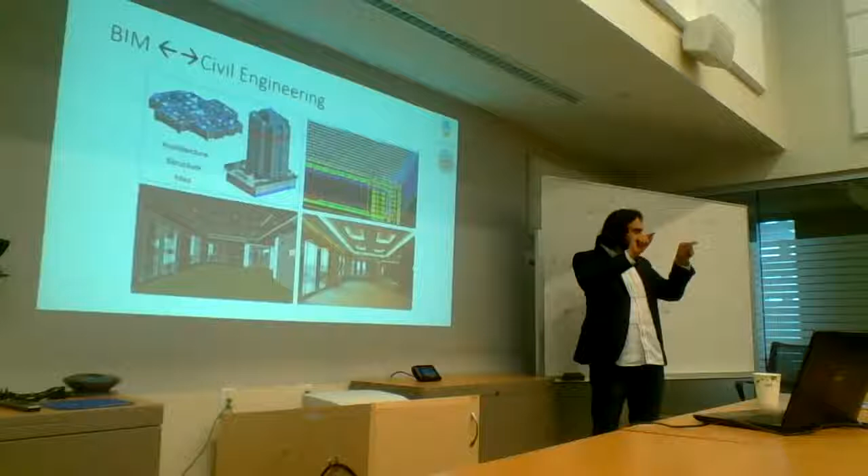There are so many definitions of BIM. Mainly it is the use of computers and IT equipment to simulate the construction before it happens, taking care of all the stakeholders at the same time. This is roughly what BIM is, but you can see many definitions online. I'm not going into detail on that. Now we have got some gist of how civil engineers can be connected in different parts of this project, on the environmental side and so on, but let's see some real applications too.

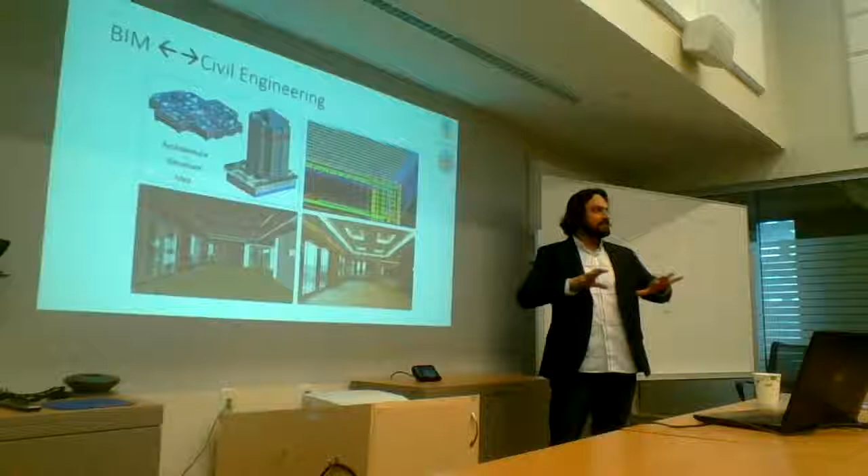So this is a real BIM model of a building where architectural drawings, structural drawings, and mechanical, electrical, and plumbing are all overlapped in 3 dimensions. So if there is any conflict, that can be seen as well. From that, the data is transported to software like SAP 2000, ETABS, and other analysis software, and seismic or gravity analysis has been done, whatever was required.

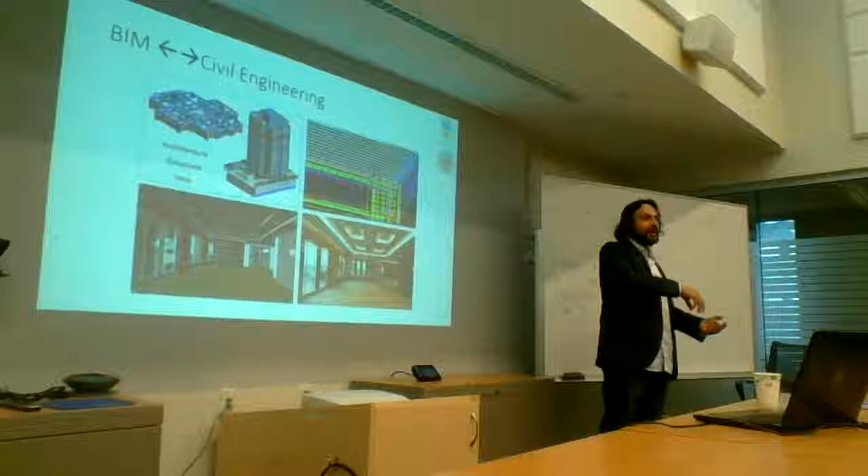And we now know that this RCC column should have this much reinforcement. Automatically, the software, SAP 2000, has transported the reinforcement detail back to this model. And now, without drawing a single line, the software has done all this drawing and detailing for us. This is very expensive, hard, laborious work for a detailer, which doesn't need a detailer anymore. It has now been done 100% automatically.

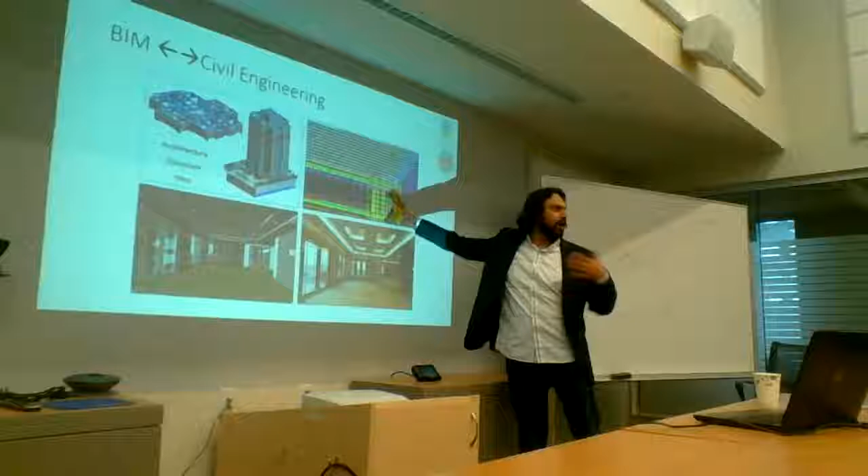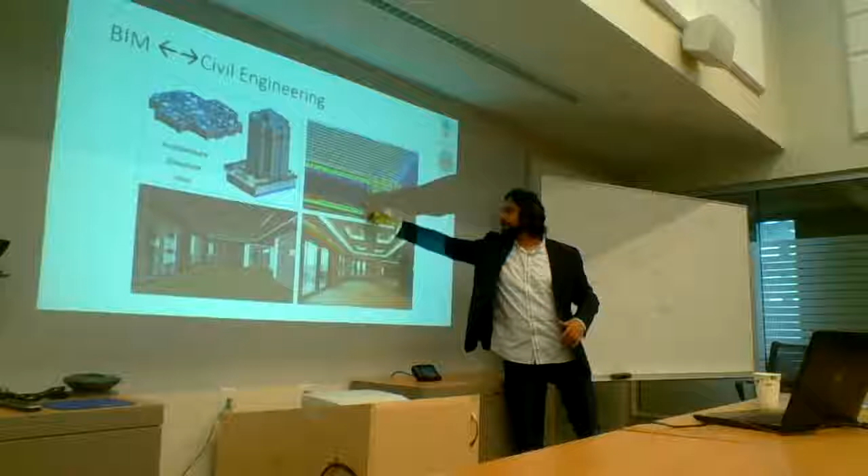So all the effort required to draw this curve and this vertical is now shifted towards the BIM experts who manage the connectivity between the experts of mechanical, electrical, plumbing, architecture, and structure, which eventually results in this. We have the white steel mesh in the slab, the positive and negative reinforcement in green and magenta in the beam, and blue stirrups. All of this was done not directly by a structural engineer, but automatically by BIM software.

This is a simulation of a building before construction, showing the least and most reflective surfaces, so that we can replace a material. It shows the material you're using and how it affects the lighting of the environment. This is the least reflective surface, and this is relatively the most reflective surface, as we see darker in color. Then this is the material model, so we can see what material we should use. A carpet. This is literally using a carpet on the floor; they're just simulating it there.

And once that is done, this is the natural and artificial lighting analysis of a building before construction. This is a computer model. It's showing how natural lighting is being affected. You can see the least reflective surface as well.

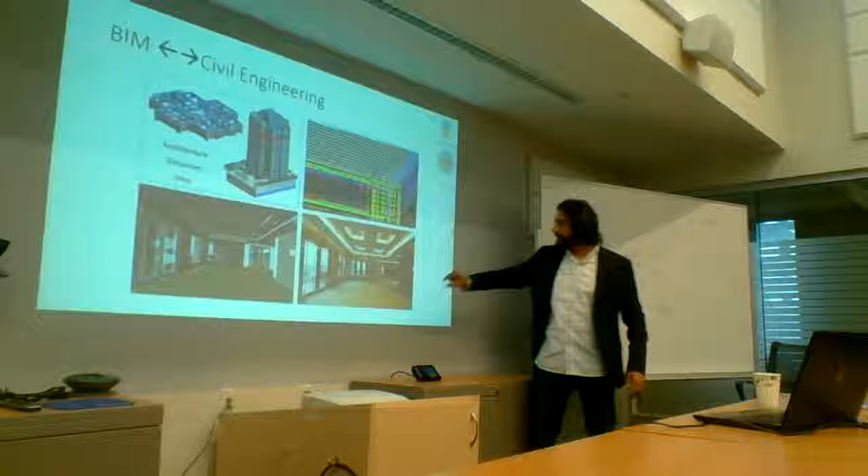Not only this, acoustic analysis can be done automatically as well. What software like Revit can do is, there's an icon for installing a tape or stereo player. You can put it in that room and play it there. And while you are moving out of the room in this simulation, you will hear the sound diminishing because you're farther from it.

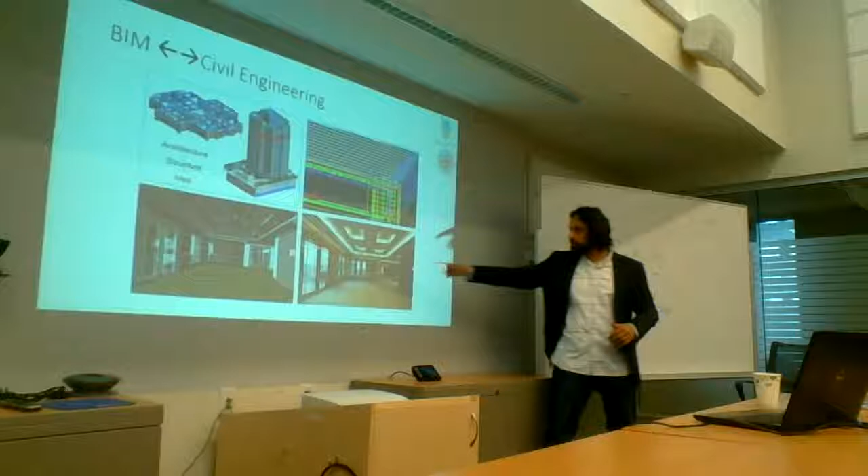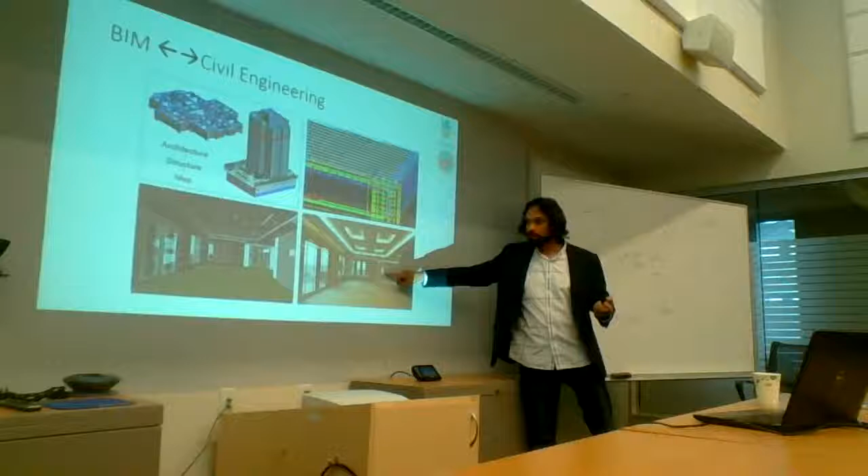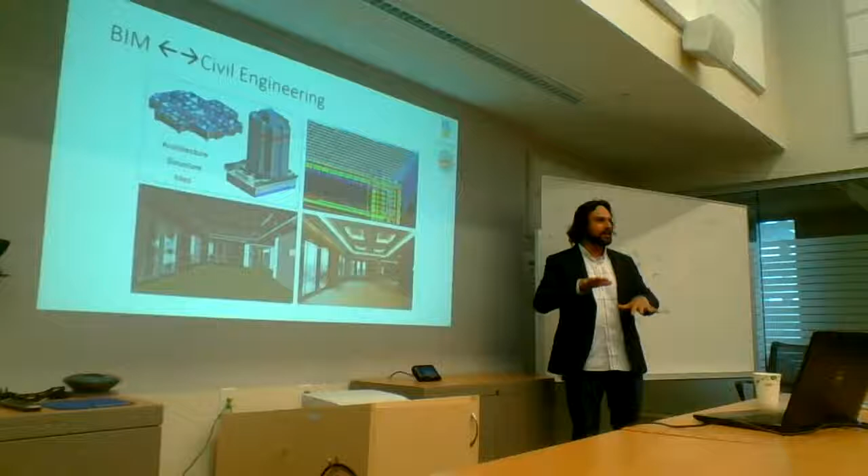And if you do this acoustic insulation structurally, with real acoustic design, as we use mathematics in that, if you do it properly, which the software can do, you will see a real control of acoustics there too. And so many other kinds of simulation before even constructing. We can do all of that. We can correct everything.

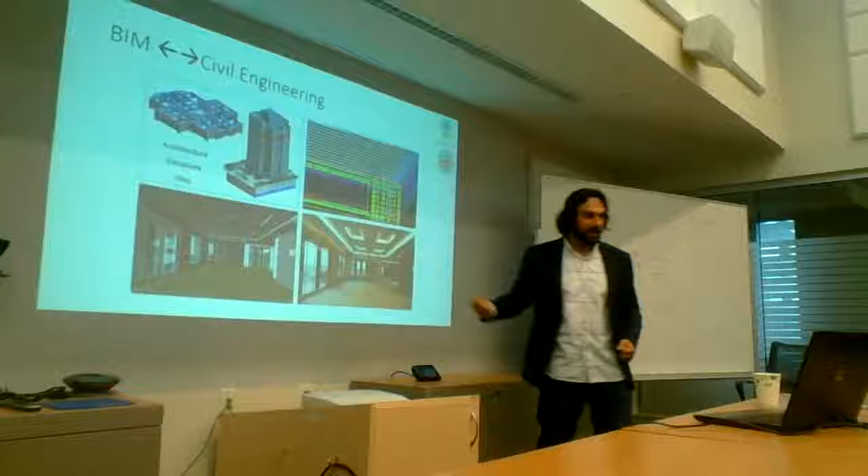We can give a real sustainable solution by using natural lighting, taking the most advantage of natural lighting from here, perhaps. Now, as I said, the construction drawings are drawn automatically. This is a view of Revit software. You will see this is the pile cap and piles, reinforcement there as well.

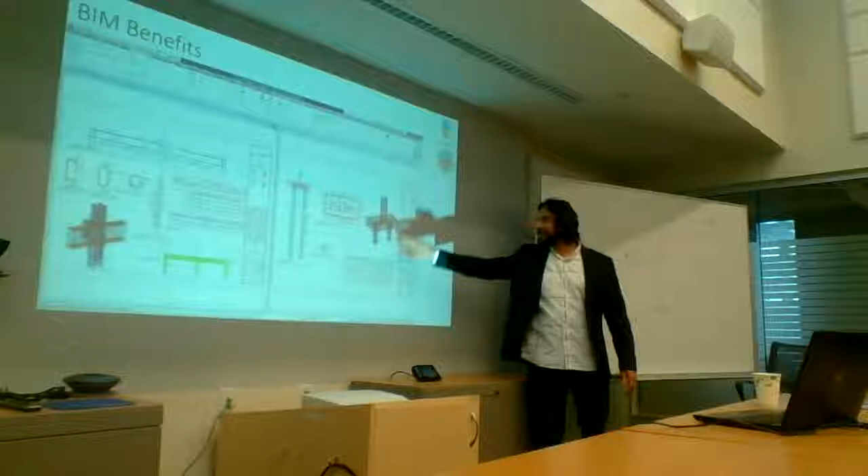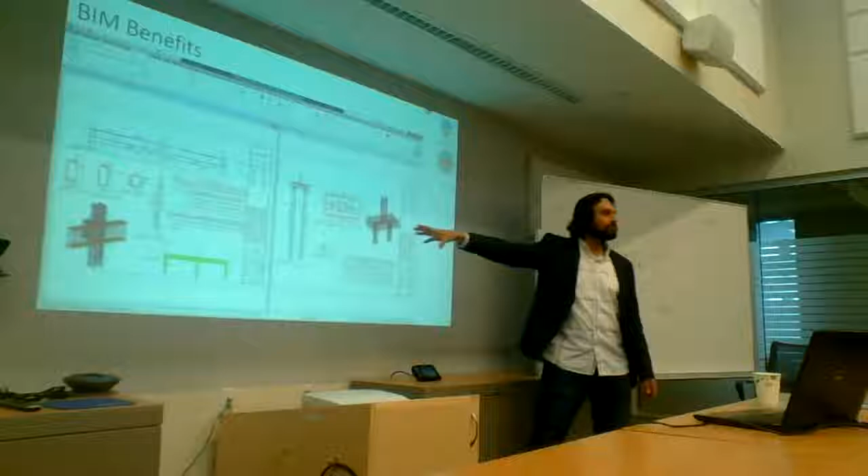There's a beam-column joint as well, very heavily reinforced. There's the bar bending schedule here as well. None of these lines and details mentioned on them are written or drawn by any person. Everything here has been done completely automatically. A structural engineer had to do some initial plan work there and someone else did the analysis there.

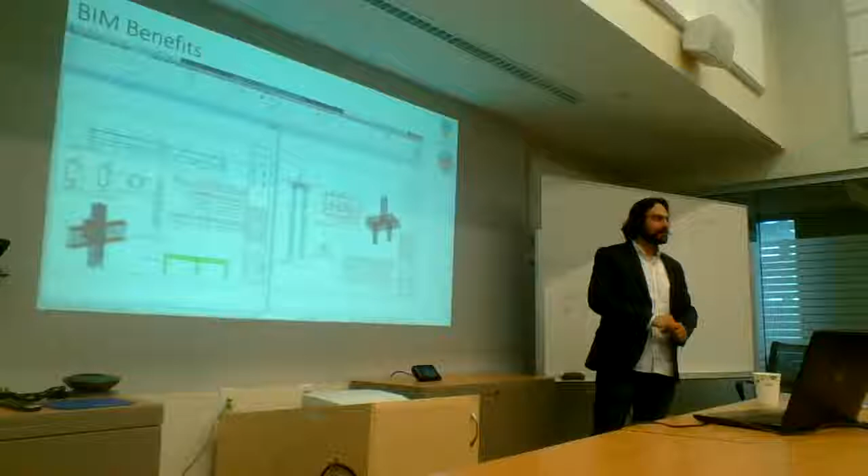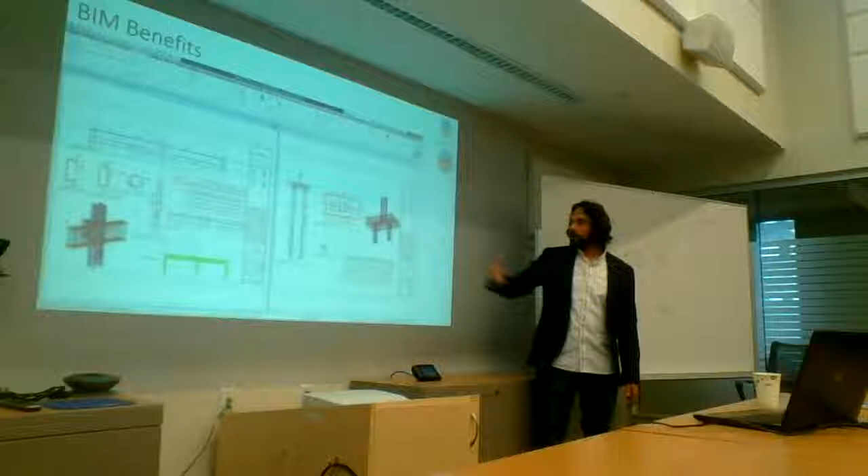And once it was time for construction, you just give some commands to this Revit software, and it will produce all these drawings automatically for us. So all this laborious hard work is not required anymore, but has been shifted towards those BIM experts. They are aware of the real things that need to be controlled, and should not be wasting time on drawing these lines and all this stuff anymore.

Now once we have talked about BIM, we have seen something that BIM is doing for us. It is important to know a term which is called the maturity of BIM or levels of BIM. In standards, they are numbered 0, 1, 2, and 3. The United Kingdom targeted 2016 to achieve level 2 of BIM, and they did it well before 2016. But the rest of the world is still struggling to achieve level 2; they are fixed at level 1 nowadays. In old times we had level 0, and even now we have level 0.

So if you're writing a contract document and signing it on paper, that is called level 0. But if that has been done automatically through an IT device, and a standard contract is automatically being developed, which open BIM software or buildingSMART software provide as open source, then there is no need of paper in doing these contracts anymore. So we are shifting towards level 2 perhaps.

Level 1 is actually the 3D and 2D models, as we use computer-aided drafting for these purposes. If you're using them for drawing, we are at level 1. So in typical offices, we have CAD drawings being done, 2D and 3D drawings, and we also do a lot of paperwork. So we do a combination of level 0 and level 1. And level 2, which has been achieved by the United Kingdom already, is collaboration. They now have automated computerized systems which do most of this automatically.

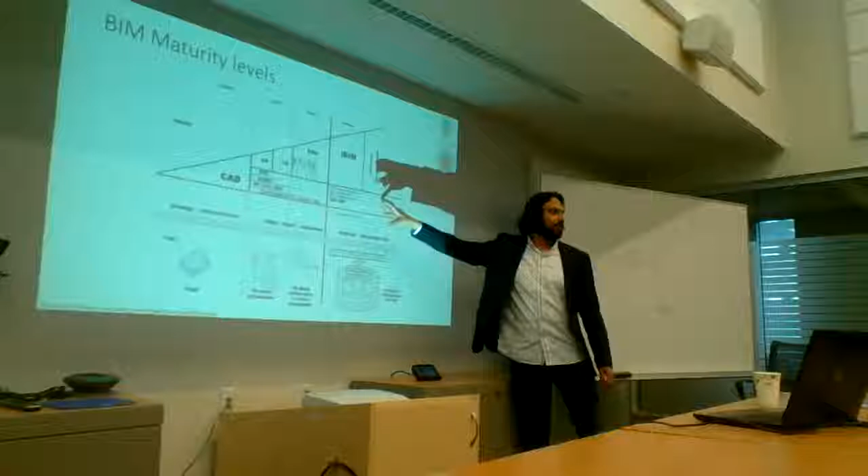I already have talked about level of detail. I'm not going to talk more on this slide. But just to see in detail what are the other things which will be in level 3. This is a very famous figure. When you search BIM levels in Google, you will see it in so many places. This is the standard that they want to achieve. We know that in level 3 we have some ISO standards that have already arrived. We are still waiting for more, so it is in front of the red line. But the UK has achieved level 2, so this red line was actually for the United Kingdom, perhaps.

And the importance of the life in sea or above the ground, the trees and all these things have been taken care of through this collaborative system. So we're doing that as well. We are not just saying that is a detailer and that person is a very big owner and investor and so on. So we are really bringing all of them together and we're listening to everyone. We're giving values to them. So it is literally spiritual as well. So really, BIM is a way to achieve sustainable construction.